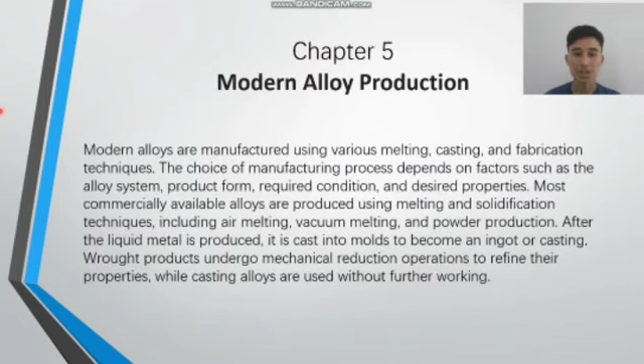After the liquid metal is produced, it is cast into molds to become an ingot or casting. Wrought products undergo mechanical reduction operations to refine their properties, while casting alloys are used without further working.

Point 5.1, effects of alloying on solidification. Solidification of pure metals: when a pure metal begins to melt, the solid-liquid mixture stays at the melting point temperature until all of the solid has completely melted. Solid metals stay at the melting point until fully melted.

The energy needed for the transformation is defined by the material's latent heat of fusion. For example, pure aluminum requires 398 kJ per kilogram to melt at 660 degrees Celsius. The temperature starts rising again only after complete melting.

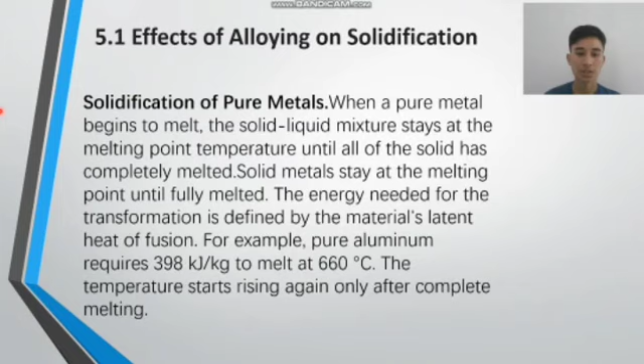Conversely, pure metals give up their latent heat of fusion and solidify at a single temperature. If a pure metal is melted and allowed to solidify in the melting crucible, a thermocouple placed in the metal during solidification could trace a cooling curve like that shown in picture 5.1.

The nucleating sites from impurities promote solidification, leading to a different cooling curve shown in picture 5.1b.

Solidification of alloys is more complex than pure metals due to different melting temperatures of alloy elements. Alloys have a mushy zone where solid and liquid coexist. The liquidus temperature marks the start of solidification, while the solidus temperature indicates completion. Different alloys have varying liquidus and solidus temperatures, shown as liquidus and solidus lines on phase diagrams.

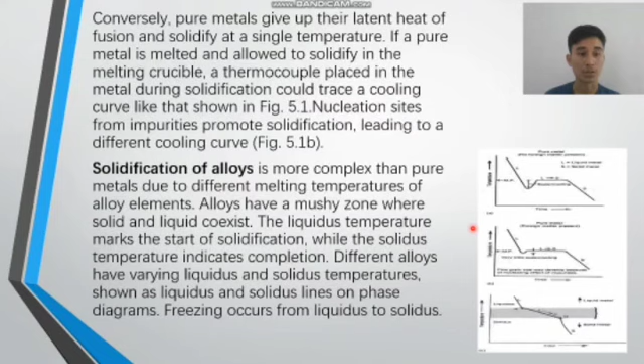Freezing occurs from liquidus to solidus. Aluminium-silicon alloys are another example of a major family of shape-casting alloys with an eutectic point. The aluminum-silicon eutectic is located at approximately 12.6 wt% Si and 577 degrees Celsius on the binary phase diagram, picture 5.2.

Alloys with a wide freezing range can cause voids during casting, while those near the eutectic melting point are advantageous for specific shapes. Aluminium-silicon alloys are commonly used to cast engine blocks in the automotive industry to reduce weight and improve fuel economy. The freezing range depends on the silicon concentration.

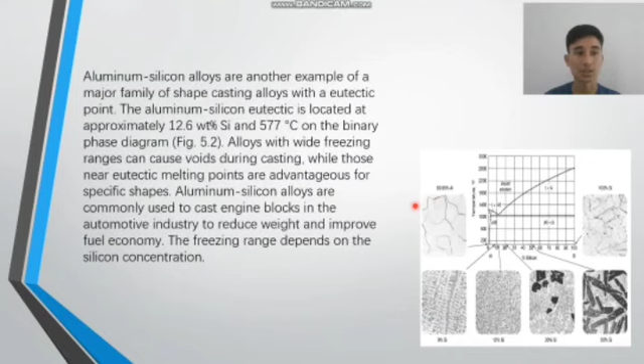Next is 5.2, solidification structures. Solidification typically exhibits planar, cellular, or dendritic growth in the liquid depending on heat removal. Planar growth occurs with a positive temperature gradient, while cellular or dendritic growth occurs with a temperature inversion.

Thermal supercooling causes cellular growth when the solid-liquid interface becomes unstable, forming spikes that grow into cellular-like structures due to temperature difference in the liquid. Dendritic growth is a further manifestation of cellular growth in which the spikes develop side protrusions, as shown in picture 5.4, at still higher undercooling and higher growth velocities. The cells grow into rapidly advancing projections, sometimes of complex geometry.

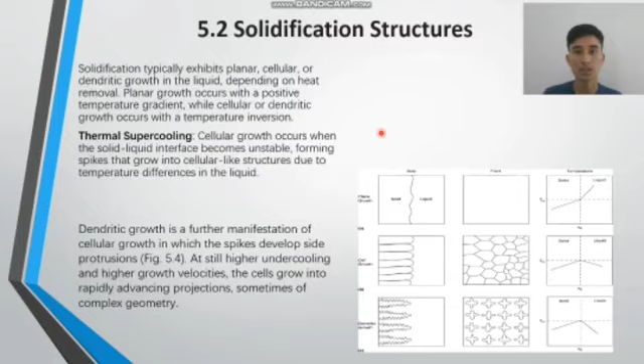Dendrites are small crystalline needles shaped like pine trees, picture 5.6, so named after the Greek word 'dendron' for tree. Dendrites have a primary arm with secondary and tertiary arms that branch from it.

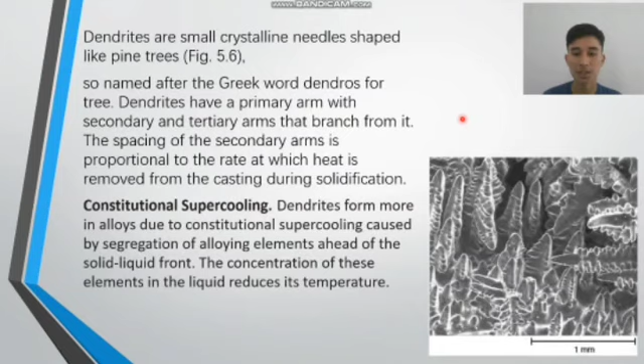The spacing of the secondary arms is proportional to the rate at which heat is removed from the casting during solidification. Constitutional supercooling: dendrites form more in alloys due to constitutional supercooling caused by segregation of alloying elements ahead of the solid-liquid front. The concentration of these elements in the liquid reduces its temperature.

Solidification zones: metal cast into a mold can have two or three different zones or types of grain growth - a chill zone, a zone with columnar grains, and a central equiaxed grain zone, picture 5.7. However, it should be noted that these three zones are not always the case.

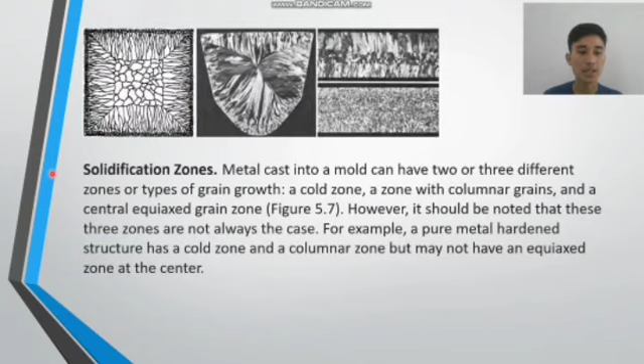For example, a pure metal's hardened structure has a chill zone and a columnar zone, but may not have an equiaxed zone at the center. Chill zone: nucleation first occurs on the interior surface of the mold because the mold is cooler than the metal. As a result of this temperature difference, the nucleation rate is initially high and the average grain size is typically small.

Its nucleation events produce an individual crystal or grain that grows dendritically in a direction roughly perpendicular to the mold wall until it impinges on other grains.

Picture 5.8, columnar zone. Inside of the chill zone, there are a series of columnar or column-shaped grains that are oriented almost parallel to the heat flow direction.

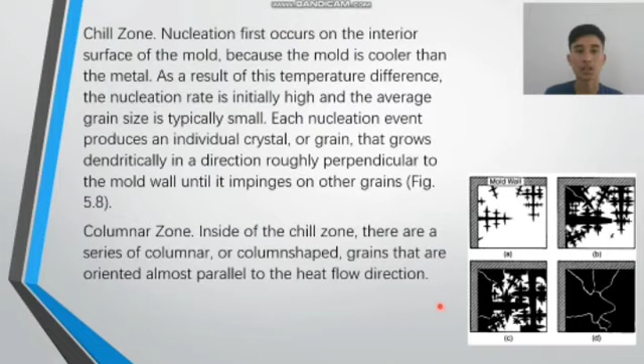Next, the center equiaxed zone. The equiaxed zone at the center of some alloy castings has smaller, randomly oriented grains with similar dimensions. Long dendrites may break and serve as nuclei for new grains due to decreased thermal gradient or segregation during freezing. Low casting temperatures result in a fully solidified equiaxed structure.

Mushy freezing. Pure metals with a narrow freezing range have mainly columnar structures, while frozen metals with a wide freezing range have equiaxed grain structures.

The formation of the first crystal results in a reduction of solid in the liquid and triggers the formation of the second crystal. This process repeats itself and produces similar grains in the solid material. Crystal and dendritic growth can be suppressed quite effectively.

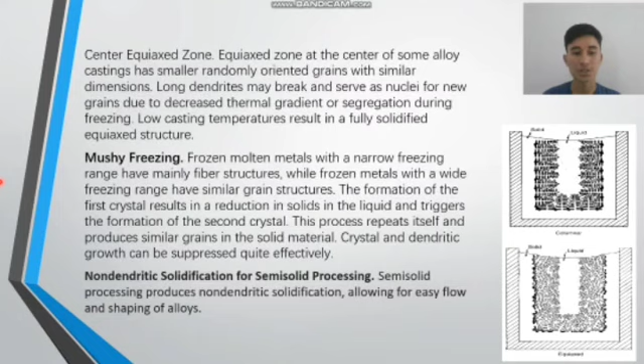Non-dendritic solidification for semi-solid processing. Semi-solid processing produces non-dendritic solidification, allowing for easy flow and shaping of alloys.

Next, 5.3, melting furnaces. Many furnace technologies are available for melting metals.

For example, in steel making, where flint iron is produced from iron ore, limestone, and coke, the aim is to reduce the silicon, manganese, and carbon content in the steel produced. Selection of a melting furnace depends on the specific alloy, casting operation, and production quantities required. Furnaces can vary in size with output ranging from a few pounds to several hundred tons.

A fuel source such as propane or natural gas is usually used to achieve low temperatures. Meanwhile, for high temperatures such as steel alloys, the furnace is designed to reach temperatures above 1650 degrees Celsius. The temperature required for aluminum alloys falls between these extremes.

Electric arc furnace. The furnace commonly used to melt steel alloys is the electric arc furnace, or EAF. It has a refractory lined vessel with a bowl-shaped hearth covered by a retractable hemispherical roof.

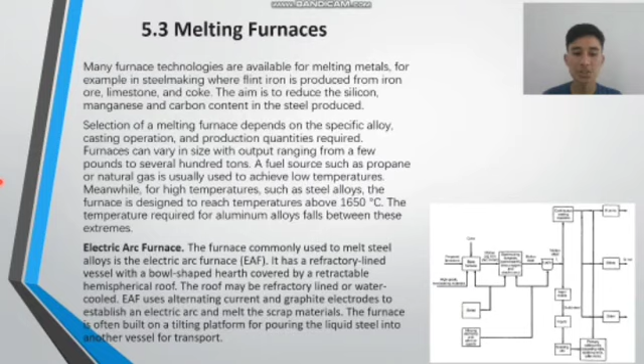The roof may be refractory lined or water-cooled. EAF uses alternating current and graphite electrodes to establish an electric arc and melt the scrap materials. The furnace is often built on a tilting platform for pouring the liquid steel into another vessel for transport.

Next, induction furnace. Induction furnaces are widely used for melting alloys due to their excellent metallurgical control, low pollution, and high efficiency. They come in various sizes, are easy to operate, and can melt small quantities of materials quickly. They can melt a wide range of metals, but have limited refining capabilities.

Vacuum induction melting. Producing liquid metal through vacuum melting in an induction heated crucible originated in the 19th century, breakthroughs in the 20th century, developed for superalloys in 1950s. These advantages have had a decisive influence on the rapid increase of metal production by VIM.

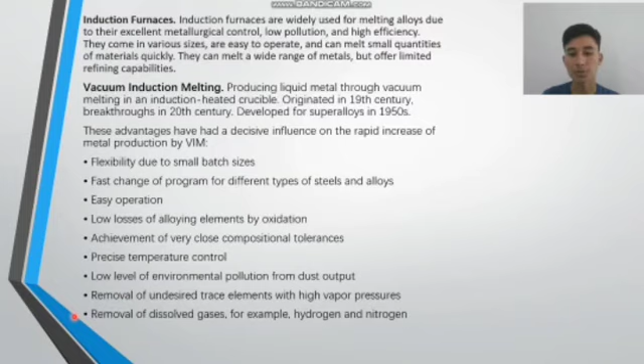Flexibility due to small batch size, fast turnaround for different types of steel and alloys, easy operation, low losses of alloying elements by oxidation, achievement of very close compositional tolerance, precise temperature control, low level of environmental pollution from dust output, removal of undesirable trace elements with high vapor pressures, removal of dissolved gases, for example, hydrogen and nitrogen.

The next is crucible furnace. Crucible furnaces have historically been the most common type of furnace used, and records dating back to the dawn of the metals industry some 6,000 years ago indicate their usage.

Crucible melting is a convenient process with flexible startup and shutdown. It allows easy alloy change and offers operation flexibility for foundries.

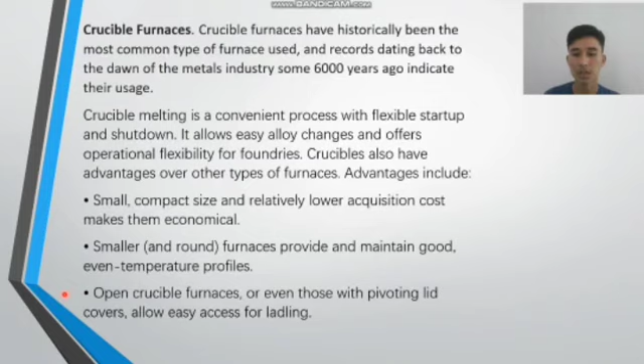Crucibles also have advantages over other types of furnaces: a small compact size and relatively lower acquisition cost make them economical. Smaller and round furnaces provide and maintain good, even temperature profiles. Open crucible furnaces, or even those with pivoting lid covers, allow easy access for ladling.

Next, remelting. There are two commonly used remelting processes for metal refinement: electroslag remelting, or ESR, and vacuum arc remelting, VAR. In both processes, an electrode is melted as it advances into the melting region of the furnace. As the working face of the electrode is heated to the melting point, drops of liquid metal that fall from the electrode face are collected in a lower crucible and rapidly solidify.

The VAR process was the first commercial remelting process used for superalloys, and these furnaces can vary considerably in their size and capacity. An example of a representative 30 ton furnace is illustrated in figure 5.18.

Other furnaces, several other types of furnaces have been developed for special applications. For example, the skull melting technique is used when melting highly reactive metals that would otherwise attack the walls of a fireplace lined with standard refractory materials.

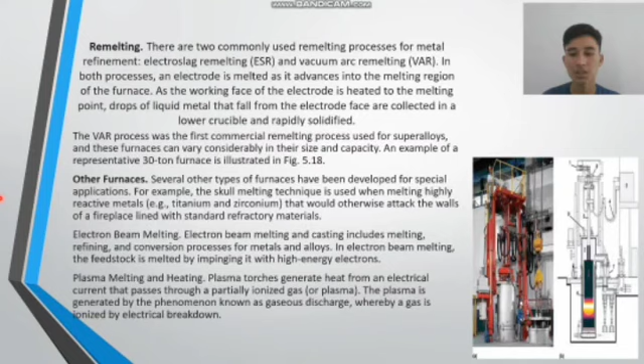Plasma melting and heating. Plasma torches generate heat from an electrical current that passes through a partially ionized gas, or plasma. The plasma is generated by the phenomenon known as gaseous discharge, whereby a gas is ionized by electrical breakdown.

5.4 Molten metal processing. Fluxing of molten metal is often the first step in obtaining a clean melt. Fluxing is a term commonly used in foundries and melting departments that refers to molten metal treatments from the addition of reactive chemical compounds or inert gases.

The various functions of molten metal fluxing additives, either singly or in combination, include removing inclusions, impurities, or dissolved gases from the melt, preventing excessive formation of solid phase inclusions, preventing and/or removing oxide buildup on furnace walls, and injecting or distributing alloying constituents.

Molten metal fluxing agents may be chemically active solids, inert gases, or a chemically active gas. The type of flux depends, of course, on the composition of the melt and refractories in iron and steel making.

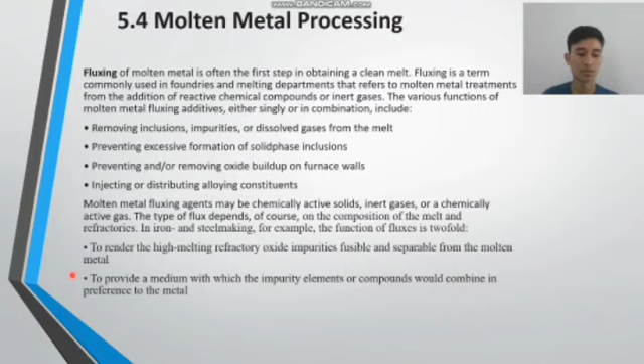The function of fluxes is twofold: to render the high melting refractory oxide impurities fusible and separable from the molten metal, and to provide a medium with which the impurity elements or compounds would combine in preference to the metal. Fluxing is also commonly done to some extent with virtually all mill and foundry melting operations.

In particular, fluxing is used extensively in controlling dross formation and removing oxides from aluminum melts and melting furnaces.

Melt cleaning fluxes are designed to remove aluminum oxides from the melt. Wall cleaning fluxes are specifically designed for the softening and removal of excessive aluminum oxide buildup that occurs on melting furnace walls.

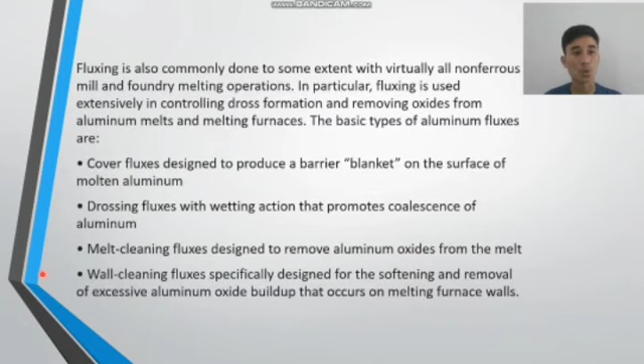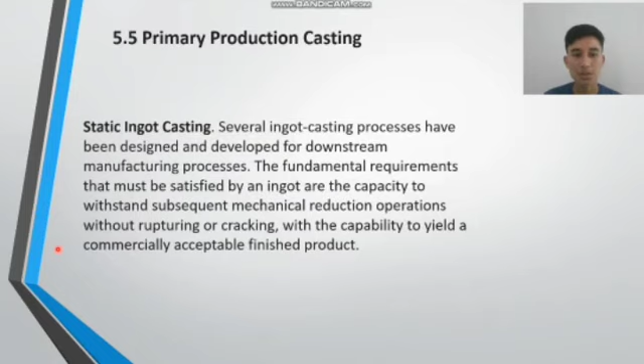5.5 Primary production casting. Static ingot casting. Several ingot casting processes have been designed and developed for the downstream manufacturing process. The fundamental requirements that must be satisfied by an ingot are the capacity to withstand subsequent mechanical reduction, operation without rupturing or cracking, with the capability to yield a commercially acceptable finished product.

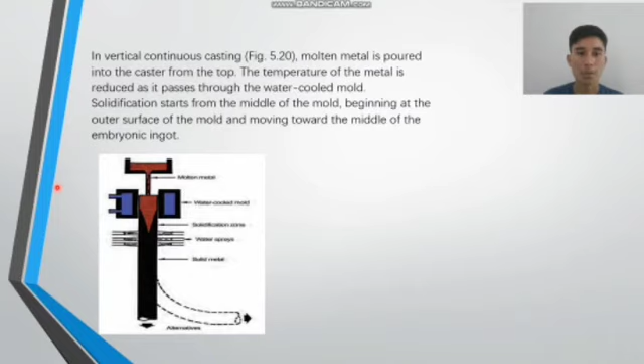In vertical continuous casting, figure 5.20, molten metal is poured into the caster from the top. The temperature of the metal is reduced as it passes through the water-cooled mold. Solidification starts at the outer surface of the mold and moves toward the middle of the embryonic ingot.

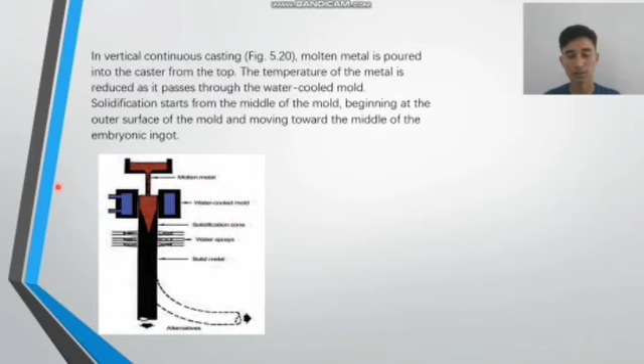In the manufacture of semi-continuous cast or DC aluminum alloys, the direct casting process is a method that is widely used today. This process involves casting aluminum into shallow water-cooled molds with the desired cross-sectional shape.

Once the metal begins to solidify in the mold, the false bottom in the mold lowers in a controlled manner and water is sprayed onto the surface of the newly solidified metal. Almost all commercial aluminum ingots produced for further fabrication use this process. The DC casting process can produce ingots with fine grain size and little segregation, with high production rates. This process can be done vertically or horizontally.

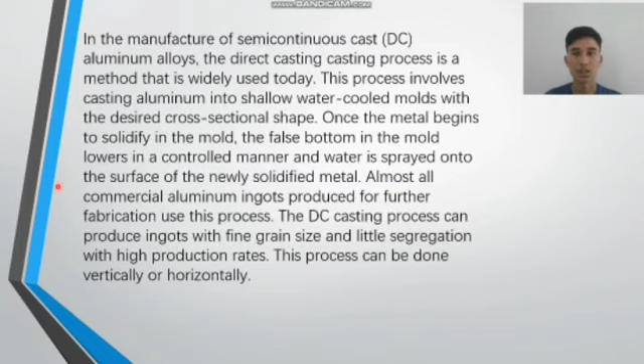5.6 Foundry casting. Foundries use different techniques to produce complex shaped parts with interior surfaces, using molds made in various ways. The selection of molding method depends on factors like part size, shape, quantity, tooling, and the molten metal used.

Shape casting methods can be divided into three broad categories: casting with expendable molds such as sand, plaster, ceramic, and graphite molding; casting with reusable permanent molds; and casting with reusable permanent molds with high pressure metal injection of the metal into the mold, including die casting, squeeze casting, and semi-solid processing.

Casting with expendable molds provides tremendous freedom of design in terms of size, shape, and product quality. Expendable mold methods are classified further as either expendable molds with permanent patterns, or expendable molds with expendable patterns.

The pattern can also be made as a disposable pattern. A common method is to use patterns made from foam or wax. The use of expendable patterns increases the complexity and tolerance of the cast product.

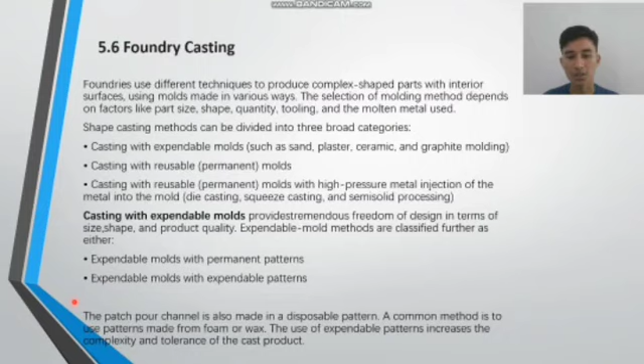Unlike permanent patterns, most expendable patterns are a positive replica of the part, as shown in figure 5.24. In lost-foam casting, for example, a foam pattern is placed in a flask. Sand is then added and compacted around the foam pattern.

During pouring of the molten metal, the foam evaporates and the metal solidifies in the resulting cavity. Permanent mold casting is particularly suitable for high volume production of castings with fairly uniform wall thickness and limited undercuts or intricate internal coring.

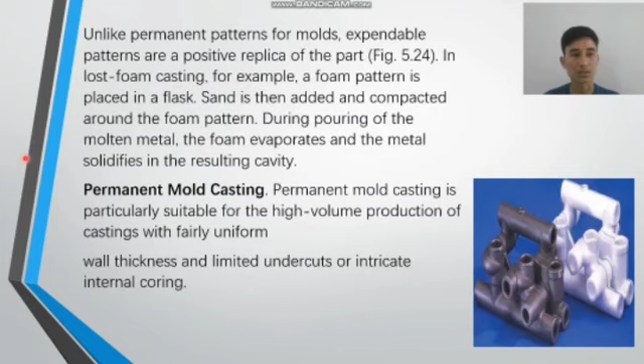5.7 Non-Ferrous casting alloys. Casting is crucial in producing titanium components, super alloys, and high-performance turbine blades. Investment casting, introduced in 1916, coupled with hot isostatic pressing (HIP), allowed for the widespread use of titanium casting. Ceramic slurry materials were developed to prevent reaction with the reactive molten titanium.

Aluminum casting alloys. Aluminum casting alloys are the most versatile of all common foundry alloys and generally have the highest castability ratings. As casting materials, aluminum alloys have these favorable characteristics: good fluidity for filling thin sections, low liquidus temperatures relative to those required for many other metals, and rapid heat transfer from the molten aluminum to the mold, providing shorter casting cycles.

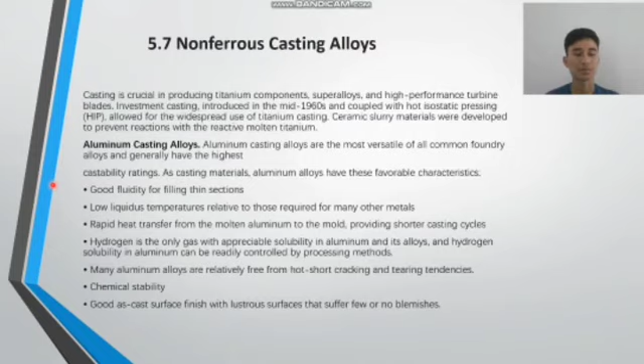The most widely used aluminum alloys are aluminum copper silicon alloys, which contain both silicon and copper. The amounts of these two additives vary so that copper predominates in some alloys and silicon in others. Copper provides strength to this alloy.

Aluminum silicon alloys have eutectics that improve moldability and reduce sensitivity to high heat. Typically, alloys with a high silicon content are used for more complex molding and die casting processes, which require more careful casting techniques to avoid problems with alloys that are sensitive to high heat. Aluminum silicon alloys that do not contain copper additions are used when good castability and good corrosion resistance are needed.

Alloys with less than the eutectic composition of approximately 12.6% silicon are referred to as hypoeutectic, with hypo meaning less than, and those with over 12.6% are hypereutectic. Alloys with silicon contents as low as 2% have been used for casting, but silicon content usually is between 5 and 13%.

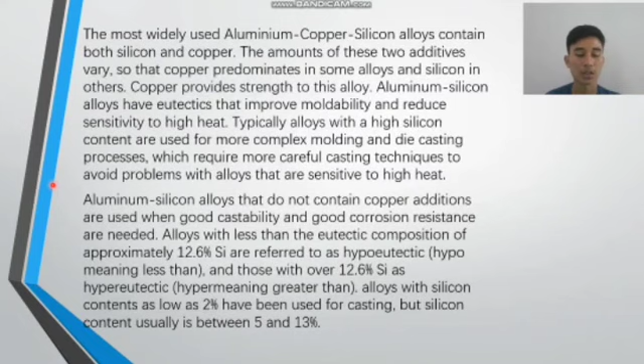Magnesium casting alloys. Magnesium castings of all types have found use in many commercial applications, especially where their lightness and rigidity are major benefits, such as for chainsaw bodies, computer components, camera bodies, and certain portable tools and equipment. Magnesium alloy sand castings are used extensively in aerospace.

Zinc casting alloys. Die casting accounts for over 90% of zinc casting tonnage. The commonly used zinc casting alloys are UNS Z33520 (alloy 3) and its modification, UNS Z33523 (alloy 7), and alloys 5 (UNS Z35531) and 2 (UNS Z35541), which are used for higher strength and hardness. Alloys 2, 3, 5, and 7 are exclusively used for pressure die casting.

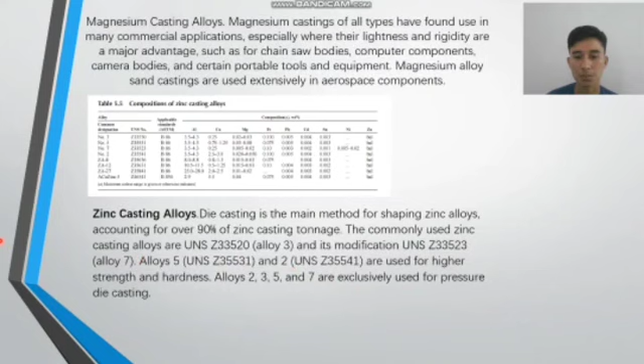5.8 Powder metallurgy. The general types of atomization processes encompass a number of industrial and research methods. Industrial methods include fluid atomization, where a liquid metal is broken up into droplets by impingement of high pressure jets of gas, water, or oil.

Centrifugal atomization, where a liquid stream is dispersed into droplets by the centrifugal force of a rotating disk, cup, or electrode. Vacuum or solute gas atomization, where a molten metal is supersaturated with a gas that causes atomization of the metal in a vacuum. Ultrasonic atomization, where a liquid metal film is agitated by ultrasonic vibration.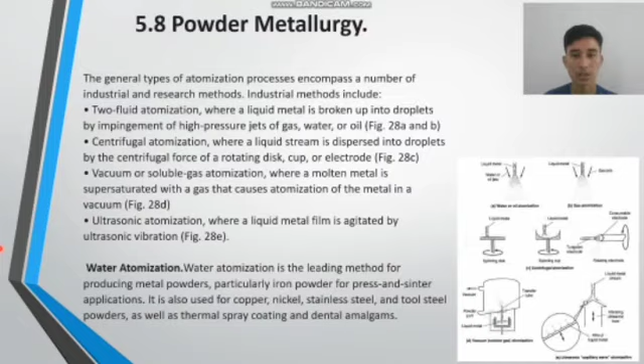Gas atomization. The gas atomization process produces powder particles with a different geometry and surface chemistry than the water atomization process. Gas atomized powders are generally rounder and have a lower surface oxygen content. This process involves breaking up molten metal with high velocity gas through a specially shaped nozzle.

On a global scale, metal powder production with the inert gas atomization method is much less than with water atomization, around 50,000 tons per year. The metal consumption rate is lower and the melt size is smaller. However, production of air atomized powders, mainly zinc and aluminum, as well as tin, lead, and copper alloys, is estimated at more than 300,000 tons per year.

Most air atomizers can operate continuously for hours or even days. Multi-nozzle units are often used to increase production with aluminum and zinc powder.